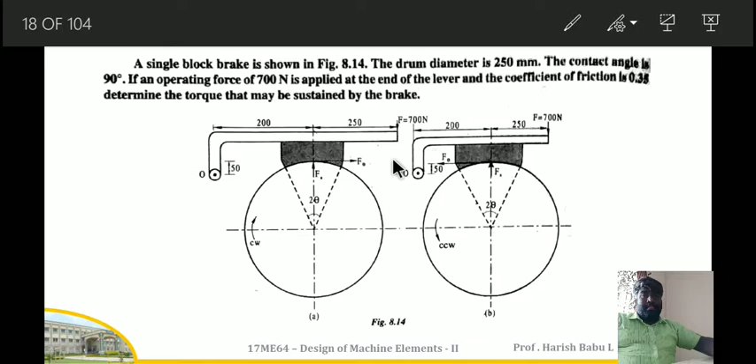Hi students, in this video we are going to discuss the problems on the block brake. So let us consider a problem. A single block brake is shown in the figure. The drum diameter is 250 mm, the contact angle is 90 degrees. If an operating force of 700 newtons is applied at the end of the lever, and the coefficient of friction is 0.35, determine the torque that may be sustained by the brake.

So if you observe the given sketch, first you have to identify which condition it belongs to. From the sketch you can clearly see that F theta, that is the tangential force, is above the center of the fulcrum and the wheel. So you have to consider that condition when you select the equation for the applied force. You have to consider both sketches, that is for clockwise as well as for counterclockwise direction.

When the wheel is rotating in a clockwise direction, F theta will be acting away from the fulcrum, so you have to take the equation for counterclockwise. When the wheel is rotating in counterclockwise direction, F theta will be acting towards the fulcrum, so you have to take the clockwise equation.

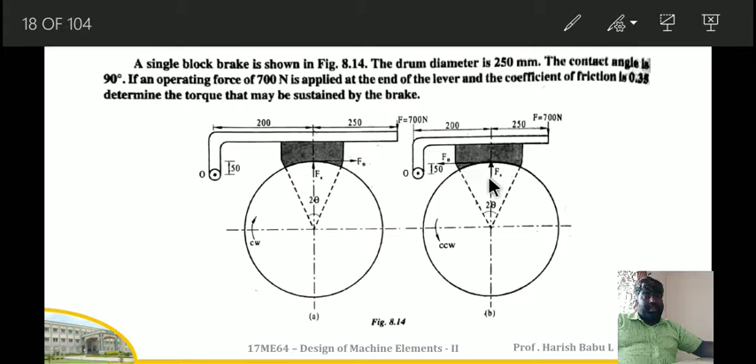Coming to the given data, they specified A, the distance between the fulcrum and the center of the wheel, as 200 mm, B is 250 mm and C is 50 mm. The angle of contact is given as 90, that is 2 theta equals 90, which is greater than 60 degrees, so you have to calculate the equivalent coefficient of friction. Diameter D is given as 250, so R equals 125 mm. Mu is 0.35, and F equals 700 Newton.

Since 2 theta is greater than 60, I want to find mu dash. Mu dash is given by 4 mu sin theta divided by 2 theta plus sin 2 theta. Substituting all the values, I get mu dash as 0.385. This is calculated only when 2 theta is greater than 60. For clockwise rotation, F theta acts away from the fulcrum, so I should consider the counterclockwise formula from table 19.1, condition C, that is figure C.

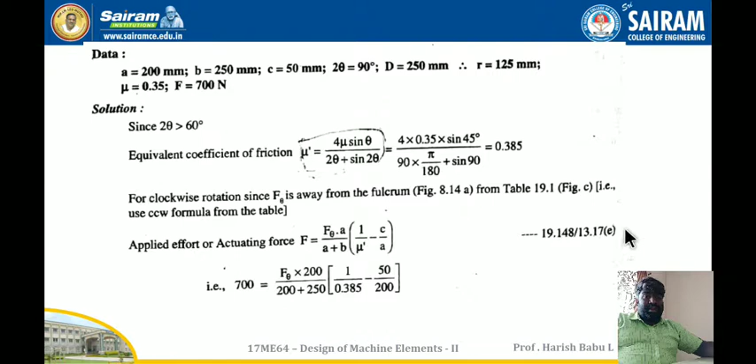For counterclockwise, the formula is actuating force F equals F theta into A divided by A plus B, multiplied by 1 by mu dash minus C by A. By substituting all the values, I find the tangential force F theta as 670.954 Newton. Torque Mt equals F theta into R. F theta is already calculated, R is given, so I get torque as 83,869.3 Newton millimeter.

If I consider counterclockwise rotation, F theta acts towards the fulcrum, so I should take the clockwise formula. Again from table 19.1, condition C, the formula is F equals F theta A divided by A plus B multiplied by 1 by mu dash plus C by A. Substituting the values of F, A, B, mu, C, I get F theta as 553.136 Newton. Then calculate the torque Mt with F theta into R, so I get 69,142 Newton mm.

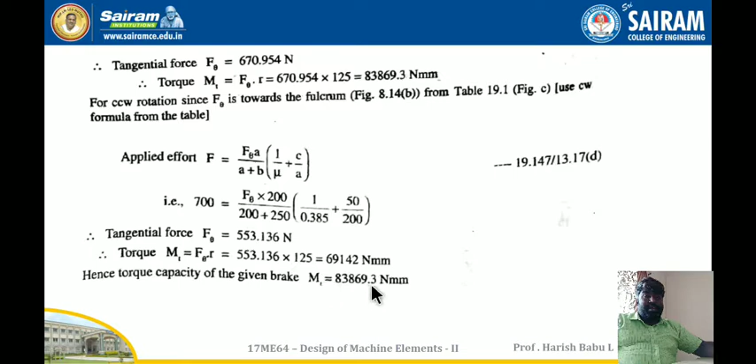If we compare both conditions, the clockwise rotation gives more torque, so that will be the capacity. So the torque capacity of the given brake will be 83,869.3 Newton millimeter.

So let us take the next problem. A block brake shown in the figure is to balance a torque of 500 Newton meter on a drum at 1000 RPM. Assume the coefficient of friction between the brake shoe and the drum is 0.25 and the angle of contact is less than 60. Determine the tangential force on the shoe, the normal force on the shoe, and force F applied to the brake for clockwise and counterclockwise direction.

The dimension C is required to make the brake self-locking, assuming the other dimensions remain the same, and heat generated. So these are the things you have to calculate from the given problem. When you observe the sketch, first you have to identify the condition it belongs to. From the sketch it is clear that F theta lies between the center of the wheel and the center of the fulcrum. So I have to consider the second condition.

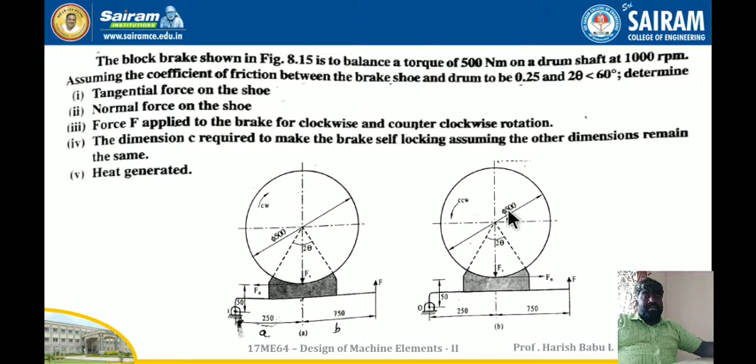When you go for the second condition, you have to consider whether it is moving towards the fulcrum or away from the fulcrum. Whenever clockwise rotation of the wheel takes place, F theta will be acting towards the fulcrum, so I have to take the clockwise formula itself. Whenever the wheel is rotating in a counterclockwise direction, F theta will be acting away from the fulcrum, so I have to consider the counterclockwise formula for the calculation.

So what data is given? A is given, B value is given, C value is given, and the diameter of the wheel is given. The torque Mt is given as 500 Newton meters, so we convert it into Newton mm, and n value is given, that is 1000 rpm, and mu is given as 0.25, and they specified 2 theta is less than 60. No need to calculate the mu dash value.

Going for the tangential force on the shoe, that is the torque formula. We know that Mt is equal to F theta into r. Mt is known, r value is known, so I can calculate the tangential force. F theta is equal to 2000 Newton. Coming to the second step, the normal force. We know that Fn is equal to F theta by mu. F theta is already calculated in the previous step, and mu value is given. Substituting the values, I get Fn equal to 8000 Newton.

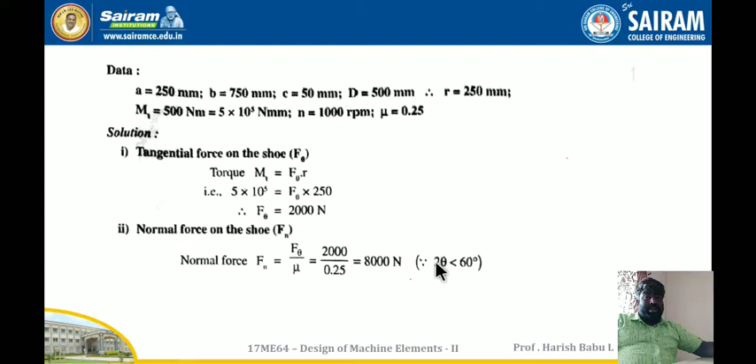Coming to the third step, applied effort F for clockwise and counterclockwise rotation. As I said previously, for the given problem, the clockwise rotation of the wheel gives F theta towards the fulcrum, so I have to consider the clockwise formula, and the condition is the second condition. From table 19.1 figure B, I take the clockwise formula: F equals F theta into A divided by A plus B, multiplied by 1 by mu minus C by A. Substituting all the values, I get F as 1900 Newton.

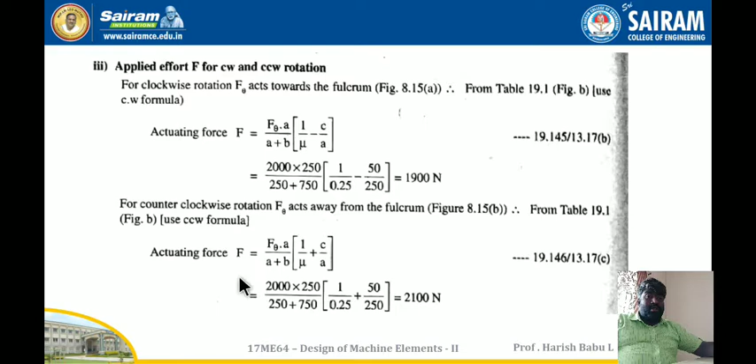Similarly, if I take the counterclockwise direction, F theta will be acting away from the fulcrum. So from table 19.1, condition B, I use the counterclockwise formula. Actuating force F equals F theta into A divided by A plus B, multiplied by 1 by mu plus C by A. By substituting all the values, I get F equal to 2100 Newton.

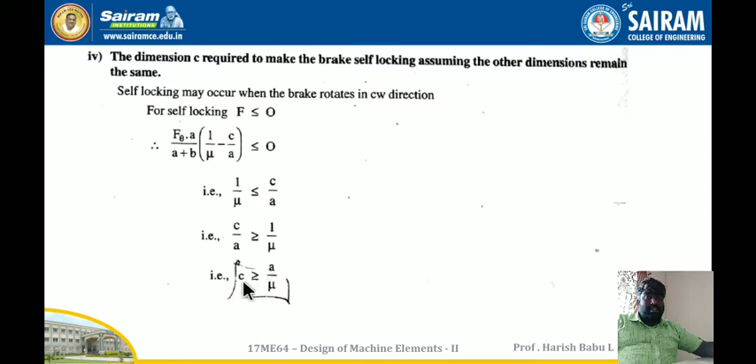The dimension C required to make the brake self-locking, assuming the other dimensions remain the same, is the fourth thing they asked. For self-locking, the effort should be less than or equal to 0. Taking the clockwise condition, F theta A divided by A plus B, into 1 by mu minus C by A, is less than or equal to 0. Or I can say 1 by mu should be less than or equal to C by A, or C by A should be greater than or equal to 1 by mu, or C should be greater than or equal to A by mu.

In this case A value is 250 and mu is given as 0.25. Simplifying, C should be equal to or greater than 1000 mm. So if C is greater than or equal to 1000 mm, the brake will be self-locking. Coming to the next one, we have to calculate the heat generated. Heat generated Hg is equal to mu P A C into V.

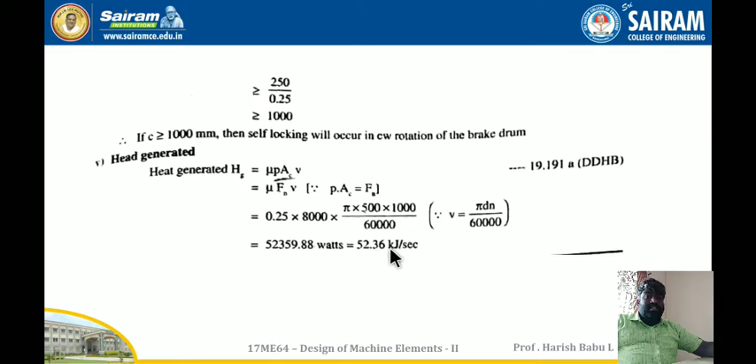So P is the pressure, A will be the area of cross section. So together it gives you Fn. So I want to substitute that as Fn. So mu Fn into V. Substituting all the values, V I want to substitute as pi dn by 60,000. So I get heat generated as 52,359.88 watts, or I can say that as 52.36 kilojoules per second.

So coming to the next problem, a single block brake with a torque capacity of 15 Newton meter is shown in the figure. The coefficient of friction is 0.3 and the maximum pressure on the brake lining is 1 Newton per mm square. The width of the block is equal to the length. Calculate the actuating force, dimension of the block, resultant hinge pin reaction and the rate of heat generated if the brake drum rotates at 50 rpm.

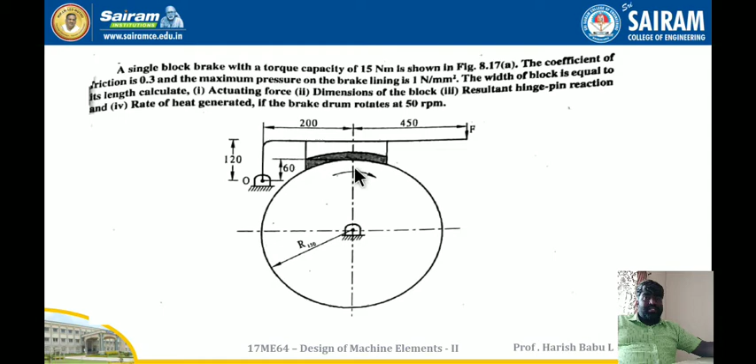So you can take the sketch over here. If you take the f theta over here, f theta will be resting above the fulcrum as well as the center of the wheel. So I have to consider the third condition for calculating the actuating force. By taking the clockwise rotation, f theta will be acting away from the fulcrum. So I have to consider the counterclockwise direction formula.

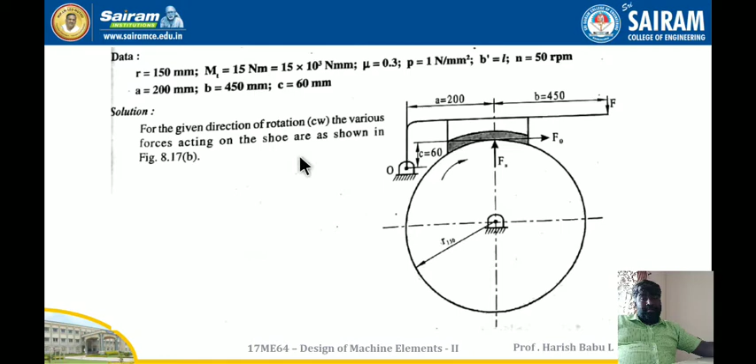So given data has been entered over here. So I will go directly to the actuating force. So Mt is equal to f theta into r. The Mt value, that is the torque value, is given. So f theta I get as 100 Newton.

So for actuating force F, since it is the third condition where f theta lies above the fulcrum as well as the center of the drum, and with clockwise rotation it is acting away from the fulcrum, I have to consider the counterclockwise formula from the table. So from table 19.1 figure C, counterclockwise formula: F is equal to f theta into A divided by A plus B multiplied by 1 by mu minus C by A. So I get F equal to 93.33 Newton.

Going for the next one, dimension of the block. Normal force Fn is equal to P into projected area of the block, that is P into L into B dash. B dash is the width and L is the length. In the problem they have given B dash is equal to L, so I substitute that, and Fn I substitute as f theta by mu. Substituting the values, I get L equal to 18.2574 mm, or L equals 18.26 mm. So the width of the shoe will be 18.26 and the length of the shoe will be 18.26.

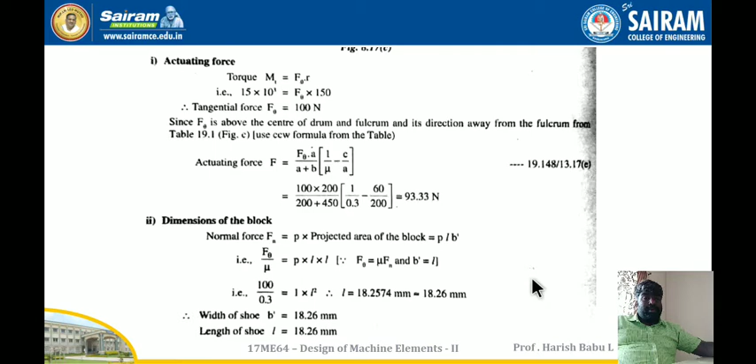So resultant pin reaction. I have to calculate both the Fx and Fy values. Normal force Fn I get as 333.33 Newton using the formula f theta by mu. When considering the vertical forces, there will be three forces acting, that is Fy, Fn and actuating force F. Fn will be acting against the F value. So I take F plus Fy minus Fn equals 0. So I get Fy equal to 240 Newton.

Similarly, for horizontal forces, I get only two forces, that is f theta and Fx. Both will be acting on opposite sides. So Fx will be equal to 100 Newton. So resultant hinge pin reaction Fr is equal to root of Fx square plus Fy square. So I get that as 260 Newton.

What is the heat generated? The heat generated formula again, Hg is equal to mu P Ac into V. P into Ac I replace with Fn and V with pi dn by 60,000. Substituting the values, I get 78.54 joules per second. So this is about the problems.